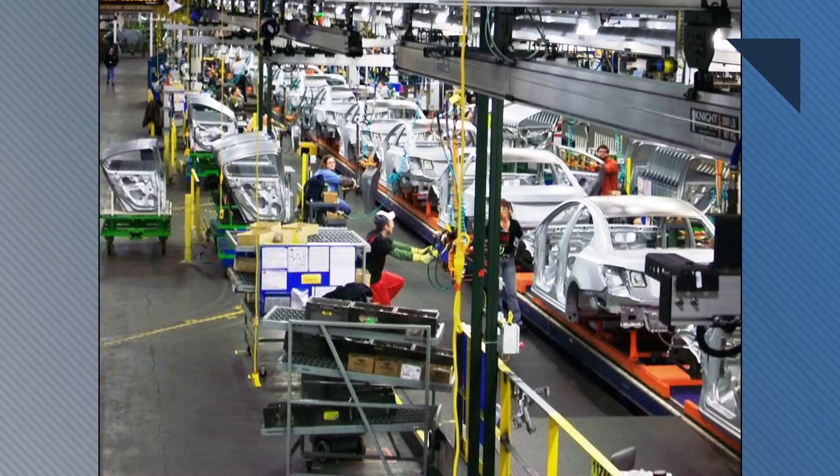Well, President Trump has got General Motors in his crosshairs again. He's not happy that GM will close the Lordstown assembly plant in Ohio, a state that was crucial to his election. Trump repeatedly promised to bring more manufacturing jobs back to the U.S., and now threatens that General Motors is not going to be treated well. Trump also claims that GM is going all electric, which he says is a mistake and will not work.

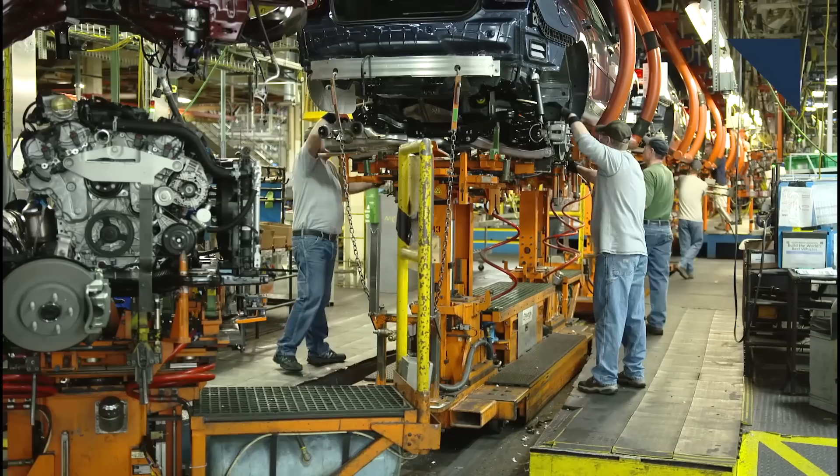Here's our Autoline insight: Trump may be right that GM's push into EVs will not work, but he's incorrect in saying GM is going all electric. General Motors is going to build piston engines for many years to come.

Say, did you know that there are at least 5 different types of hybrids? That's coming up next.

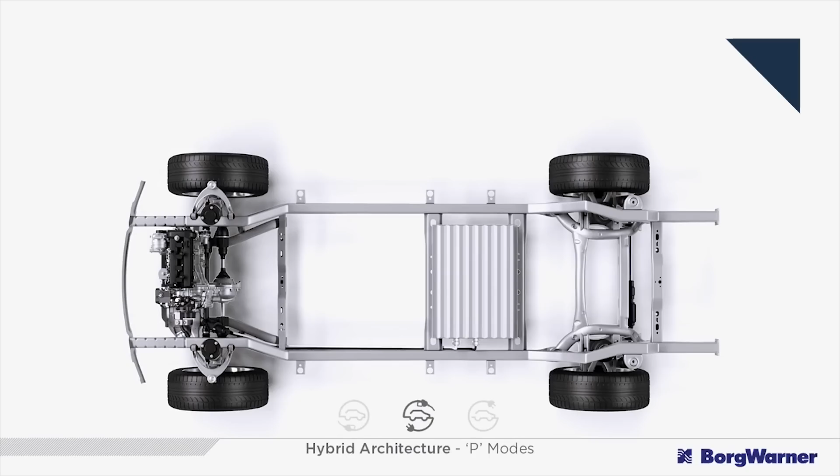The public talks about hybrid cars as if they're all the same, but the auto industry uses very specific terminology to differentiate 5 types of hybrids. According to BorgWarner, the simplest level is P0, which is a belt alternator system where the alternator doubles as an electric motor.

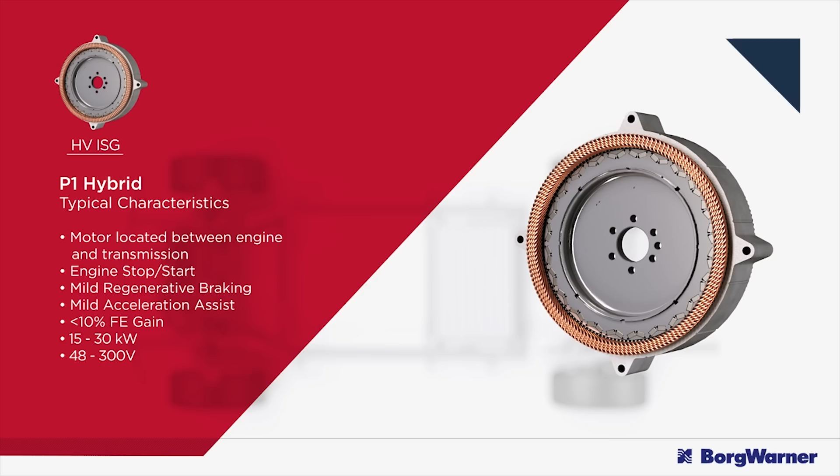Next up from that is P1, with an electric motor located between the engine and transmission, but with no clutch between them. A P2 hybrid uses the exact same layout, but with a clutch that allows the vehicle to travel in pure EV mode.

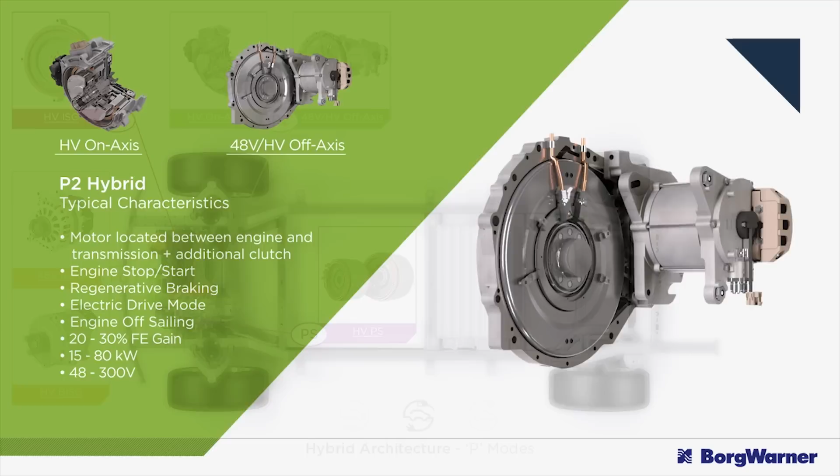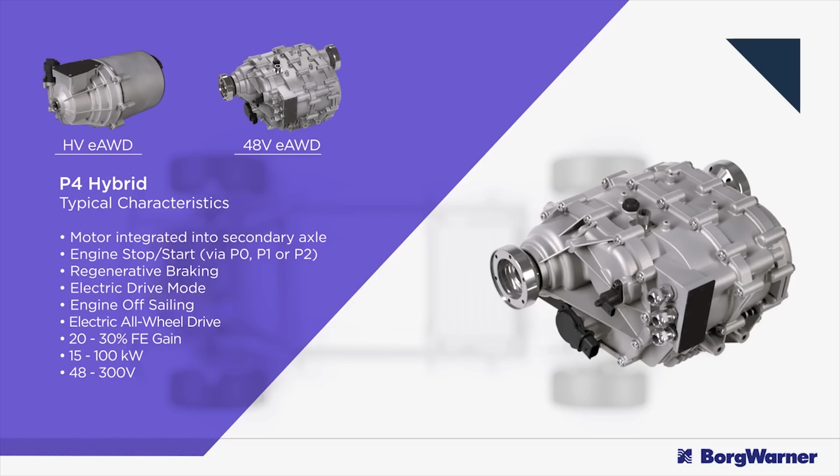A P3 hybrid has an electric motor located on the backside of the transmission and can also travel in pure EV mode. And a P4 hybrid uses an electric motor mounted on an axle that is not driven by the piston engine, for example, on a front-wheel drive car that uses an electric motor on the rear axle.

Automakers like these different types of hybrids because it gives them a lot of flexibility with packaging and cost. That makes it simpler to convert different types of vehicles into hybrids at different price points. And we point this out to make sure that all of Autoline's viewers are up to speed with the industry's terminology.

Volvo was caught off guard by the popularity of its subscription service, and we'll have more about that right after this.

We've seen a number of automakers launch subscription services for their vehicles. The programs charge customers a monthly fee that typically includes the car payment, insurance, and maintenance. On Autoline this week, the head of Volvo's U.S. operations, Anders Gustafsson, talked about how its subscription service, Care by Volvo, was much more successful than the company expected.

But back to the success of Care by Volvo, we took a decision to launch Care by Volvo related to XC40. And XC40 has been a huge success. I don't like to use the word sold out because that's not always good, especially not in the US when you like to have the car à la minute. But it is really a success.

And so right now we had a target together with our partners, our retailers, that 10% to 13% of our volume should be related to Care by Volvo. And we reached that number after 3 or 4 months, with the XC40. A little bit too early, I would say. That was not in our plans.

And now when we launch Care by Volvo with the S60, with our own plant in Charleston, we don't have production capacity problems. We have more opportunities. So let's see, but it's around 2,000 cars.